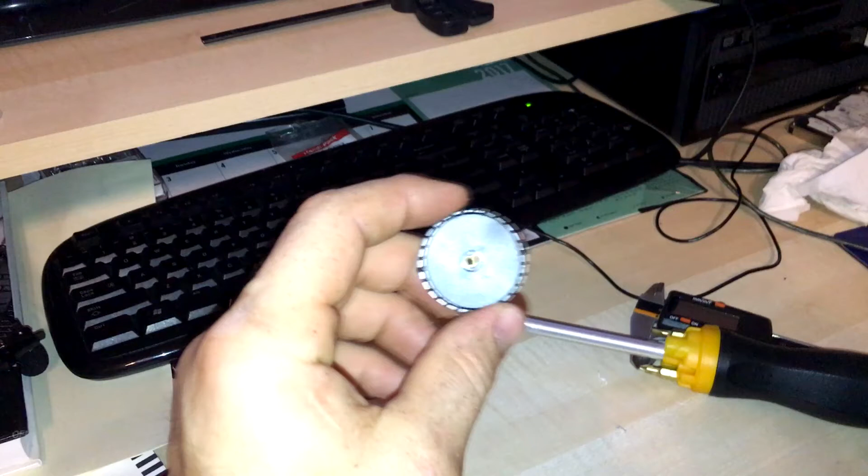Today on Do It, I'm going to be showing you step by step how to create a 3D model of this MakerBot build plate leveling knob so that we can 3D print it as a replacement.

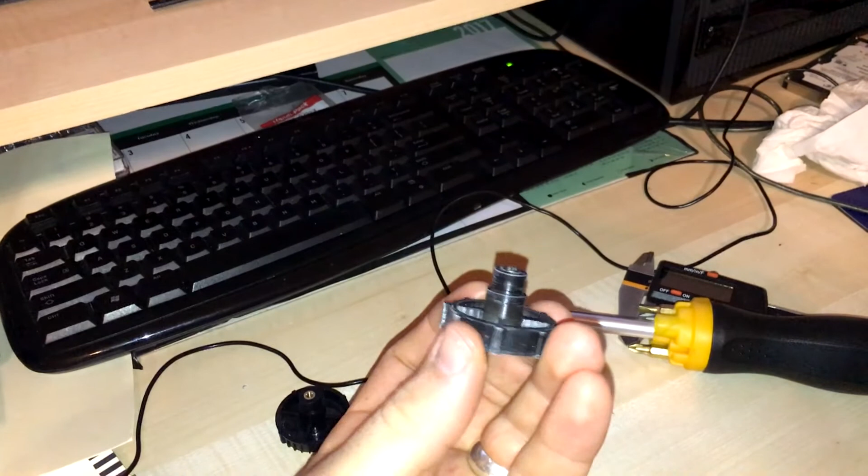Alright, so let's see if we can't guide you through my modeling process for this knob. Something that I brought up in a previous video that's worth mentioning again is that SketchUp is not always the best choice when trying to model something that you know you're going to 3D print, for a number of reasons that I'm not going to go into detail in this video, but I did find a great resource, this website here, iMaterialize. Let's get rid of that ad. iMaterialize 10 tips and tricks for 3D printing with SketchUp.

It's a really great rundown of some of the ways to get around certain features of SketchUp that might hinder your model from 3D printing in the best way possible. So I'll leave that link in the description, but it's a really great write-up with some good images and some great tips if you're looking to use SketchUp for that reason.

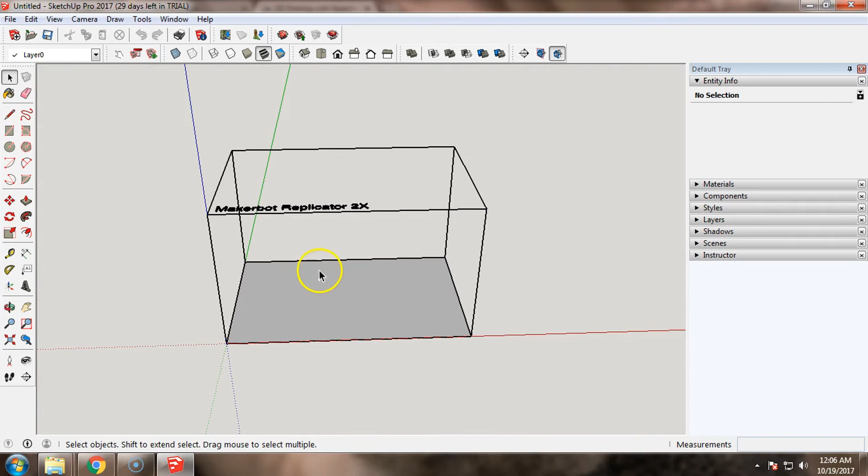You always have to start by using a template. I've already scrolled down here to a 3D printing millimeters. I'm going to use millimeters because our MakerBot is always in the units of millimeters. So this template isn't really anything more special except that it comes with a component already on the zero axis here that represents the print area for a great number of 3D printers out there on the market.

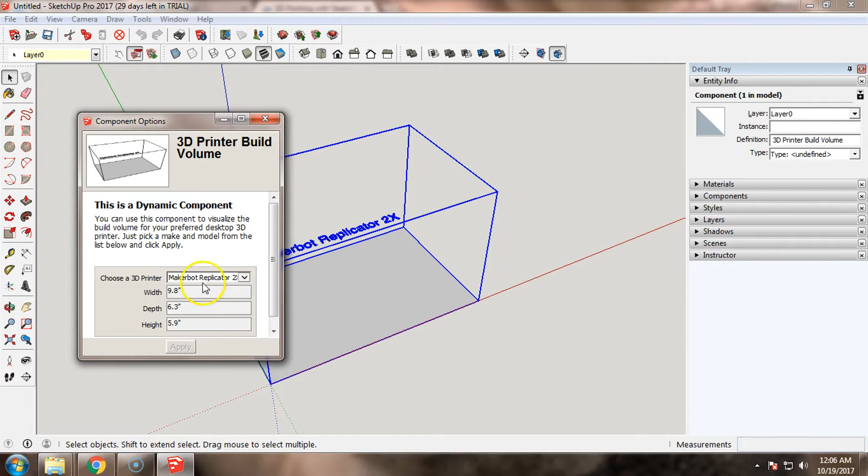And I can show you if I select it here and go to my dynamic components menu, you can change the 3D printer that you are seeing and its print volume. So here, by default, it shows MakerBot Replicator 2X. And here's what makes me laugh. So we're going to be using a MakerBot Replicator Mini, this one.

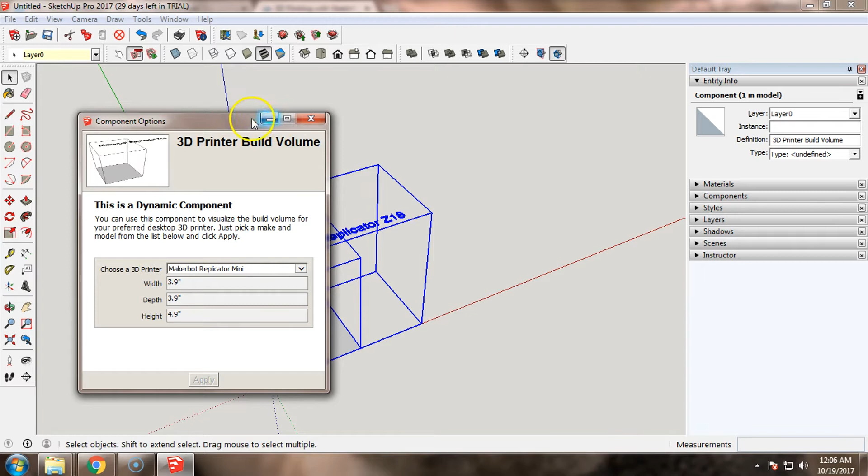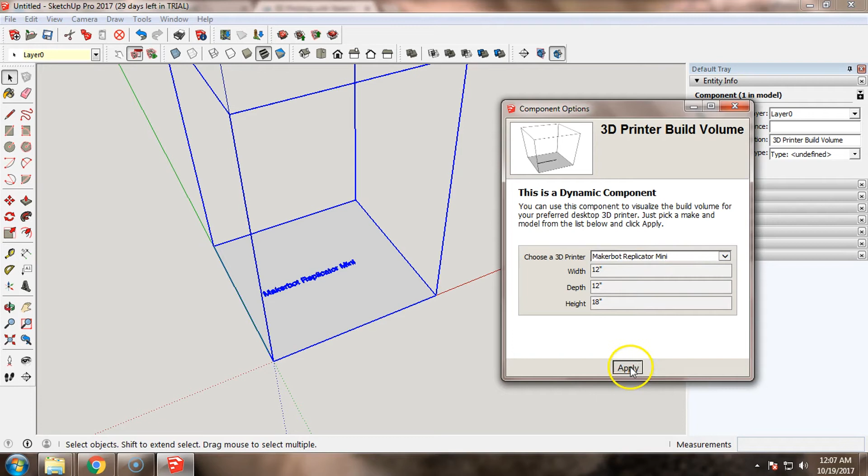But the title shows, watch this when I apply and change, a Replicator Z18, even though the print volume is representing a Replicator Mini. It makes me laugh. If you show a Z18, print volume is accurate, but then the title changes to Mini. So I don't know who needs to contact Trimble and let them know that their software has a slight typo in their component here, but anyway, worth mentioning. So I'll go ahead and put the volume for a Replicator Mini here, even though it says Z18.

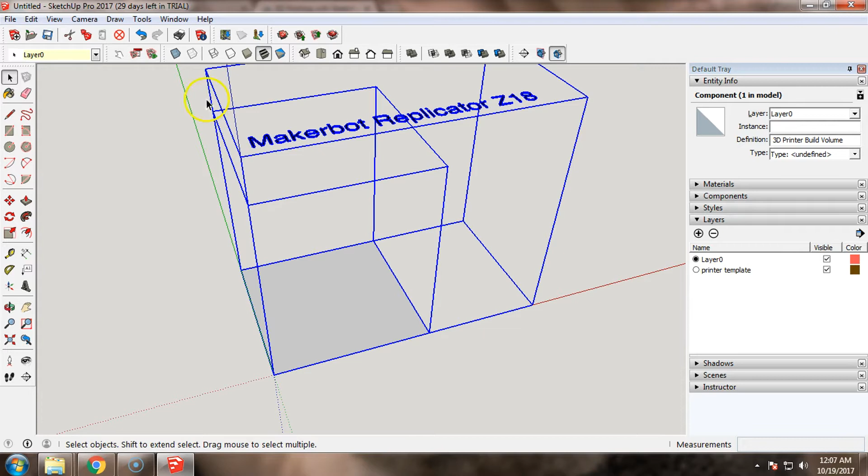And one last thing, I don't really want to be staring at this the whole time, so in my layers, I'm going to create a new layer, call it the printer template, and we're going to move it to the printer template, and we're going to blank that out, make it invisible, so we can model on a nice clean area here. So let's get started.

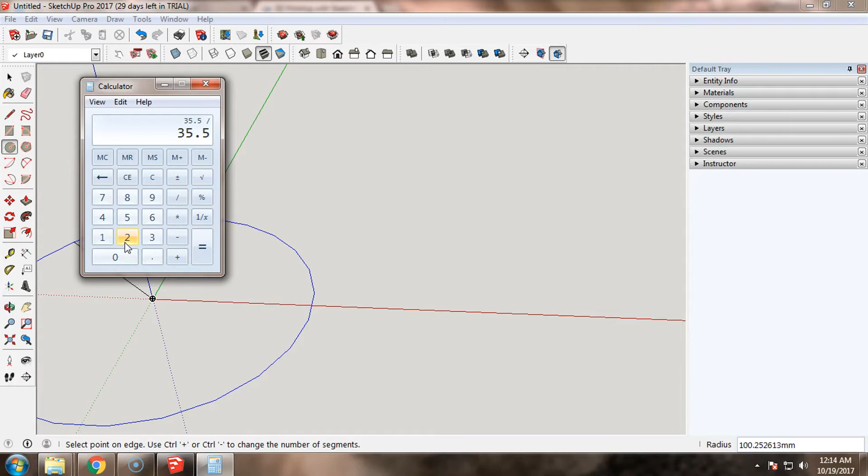So it isn't too crucial to be 100% accurate on some of the parts of this knob that don't house important components. So I'm just going to kind of race through a lot of these measurements and modeling, and I see that the outermost diameter of the knob is 35.5 millimeters. So since SketchUp asks for everything in radius, I always like to have my calculator handy. 35.5. Not that I can't do this in my head, but it's always good to check. 17 3/4 millimeters.

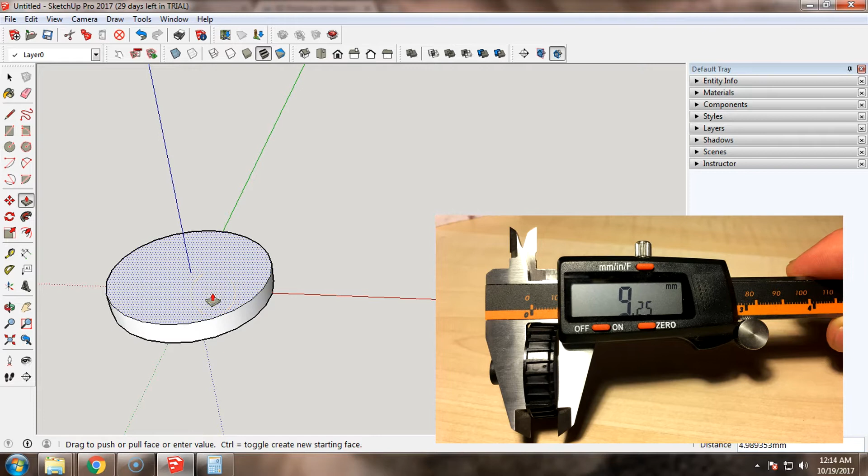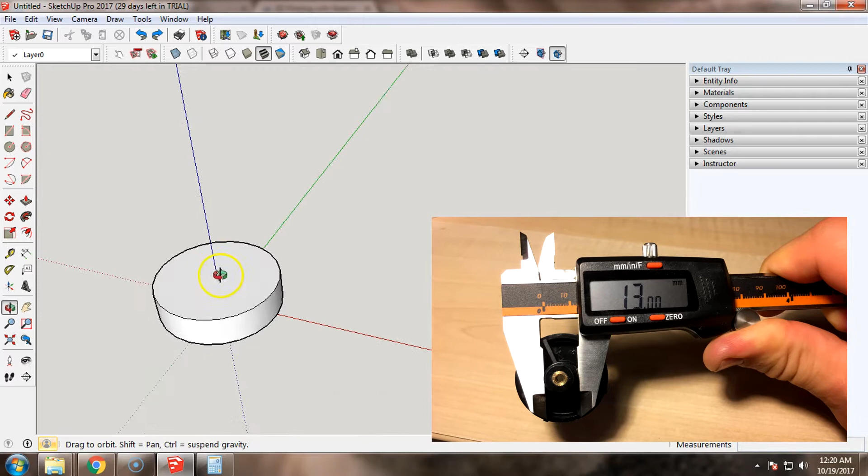Off we go. The height of that part of the knob, the thickness of it, is 9 1/4 millimeters, so 9.25 millimeters. And we're off to a good start. It looks like the center cylinder coming out is approximately 13 millimeters in diameter. Half of 13 is 6.5. So let's find our inference to the center here. 6.5. Enter. And let's go ahead and extrude him his full height.

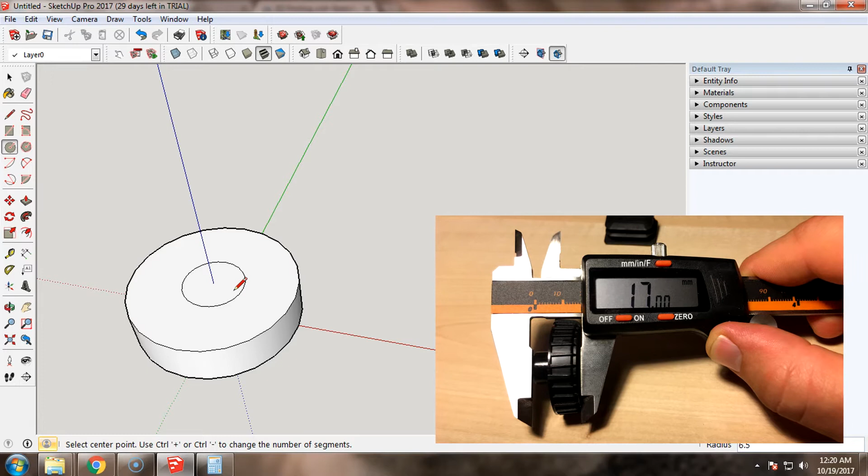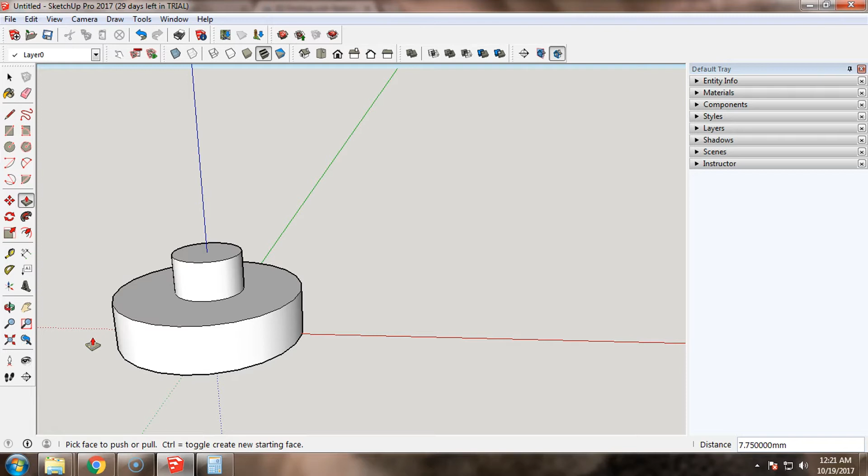And from the very bottom of the model is 17 millimeters. And since we've already extruded 9.25, 17 minus 9.25 is 7.75. From here, let's create sort of the hollow features of the knob. This not only is going to keep it more lightweight, but it's going to save us a lot of material when we 3D print. So rather than create this all solid, let's create those little cross supports and hollow it out where it's supposed to.

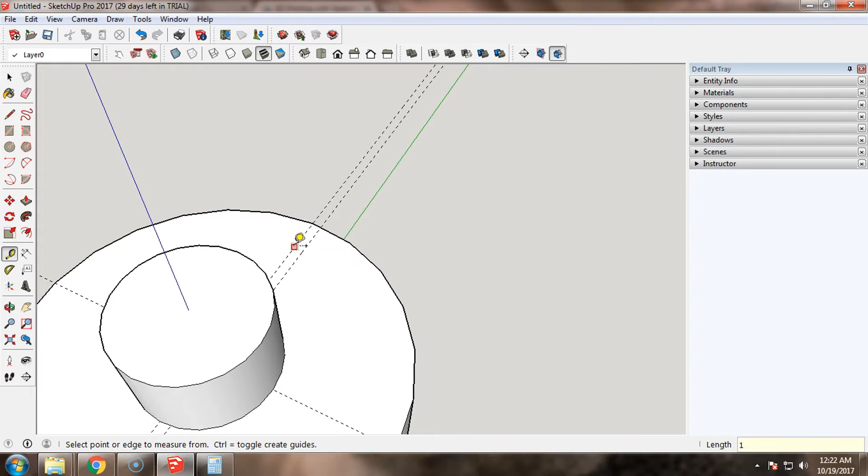So rather than move this guy, I'm going to bring the axes up, and I can see that the thickness of the supports of the little cross members are just shy of 2 millimeters, and just to keep things simple, I'm going to round it right up to 2 millimeters. So if I offset each of these by 1 millimeter, those outer guides now represent the outer edges of the supports.

And just in the spirit of keeping things simple, let's make the very outer, I think I had a measurement. Let's take it again. Yep. Very outermost part of this was 2 millimeters as well. So let's go ahead and select it and use the offset tool. 2 millimeters. Now we have all the geometry we need to reference these guys.

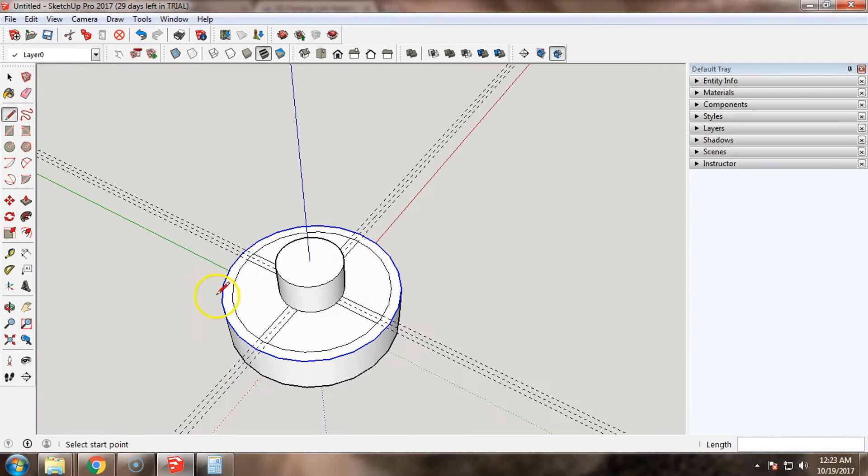I'm going to do this on all 4 sides. There are different ways of doing this. Once you create one quadrant a certain way, you can certainly use the rotate tool and array those features, but this isn't too bad if you're only creating 4 anyway. So there's all 4, and if I did it correctly, I can erase some of this connecting geometry, and that will link them all where they need to be.

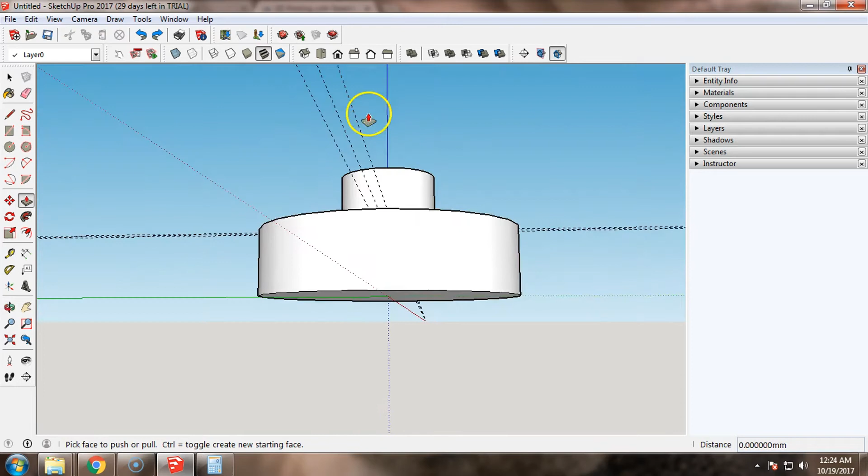And these 4 faces are indeed their own faces. So when I push-pull them down, I should be left with this outer ring as well as the 4 little quadrant supports. So in the interest of keeping as many things uniform as possible, but also conserving my strength, integrity of the part, I want to leave at least 2 millimeters of thickness of this bottom part. So since we extruded him 9.25 millimeters up, let's just bring him down 7, which should leave me with 2.25 millimeters of material at the bottom here.

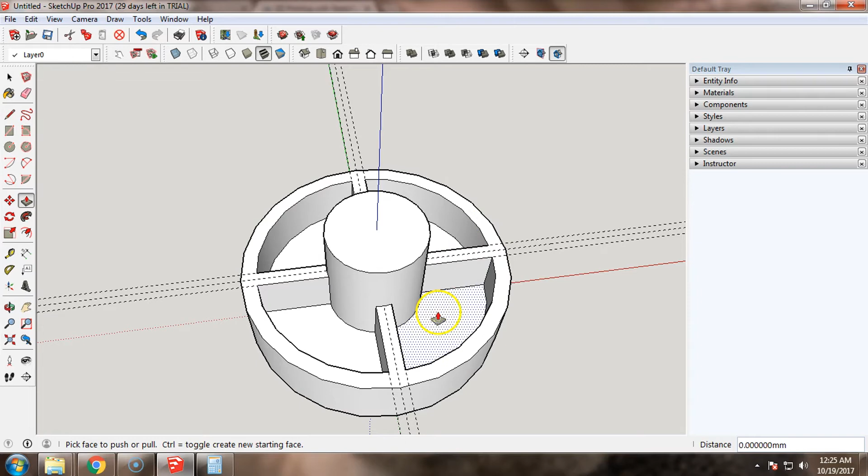So select one face, hit 7, down he goes. And quick tip, SketchUp remembers the last value of whatever function you used. So rather than selecting and inputting that value, I'm just going to double click and it will continue to use 7 as its value. And now we're starting to get a part that looks a little bit like our original knob.

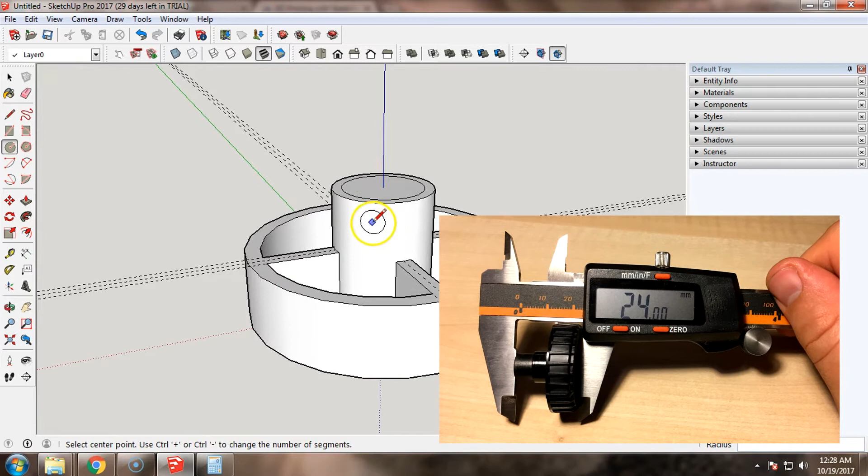So it looks to me like the diameter of the cylinder that extends from this face is 10.5 millimeters in diameter. Half of 10.5 is 5.25. So that's our radius, 5.25. And its height from the very bottom is 24 millimeters. And since we've already extruded 17 of that, looks like we're going up 7 millimeters. Oops, wrong tool. Push pull, this face, 7 millimeters.

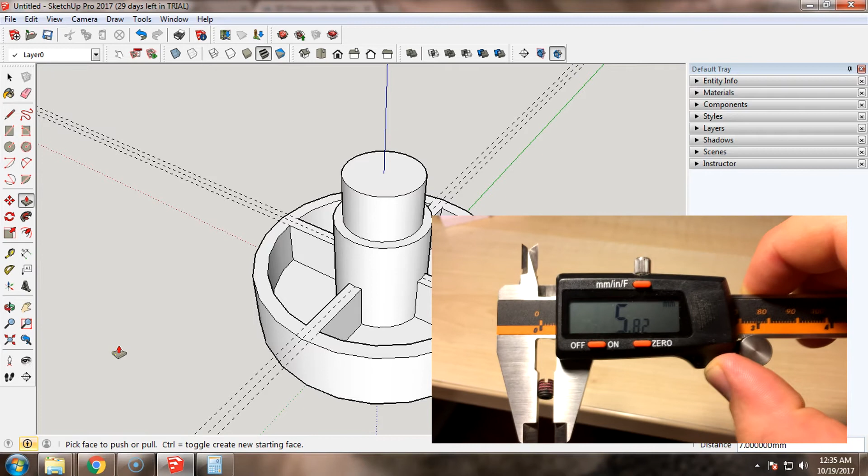So the original knob has its own attractive, exact threaded insert, but I had to go to the hardware store and find my own. And the height of it is exactly 6.5 millimeters, and the outer diameter of all the threads is about 5.8 millimeters. So what I'm going to do is make my hole here 5 millimeters in diameter, which is 2.5 millimeters radius, 2.5. And I'm going to extrude it down the exact measurement.

It's kind of a risk. Our 3D printers aren't so finite to get to the 1/10 of a millimeter. But let's have some fun. I'm just going to extrude it down and go exactly 6.5 millimeters and see what happens when I thread that guy in here. And I'm also planning on using some plastic specific Loctite super glue.

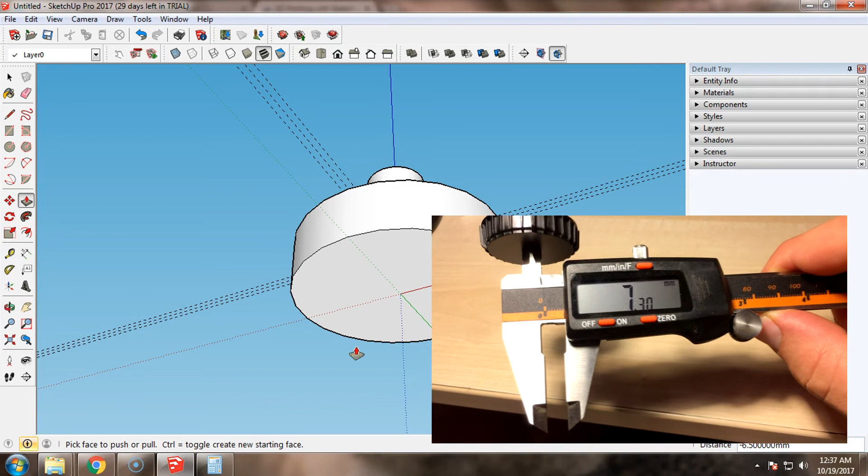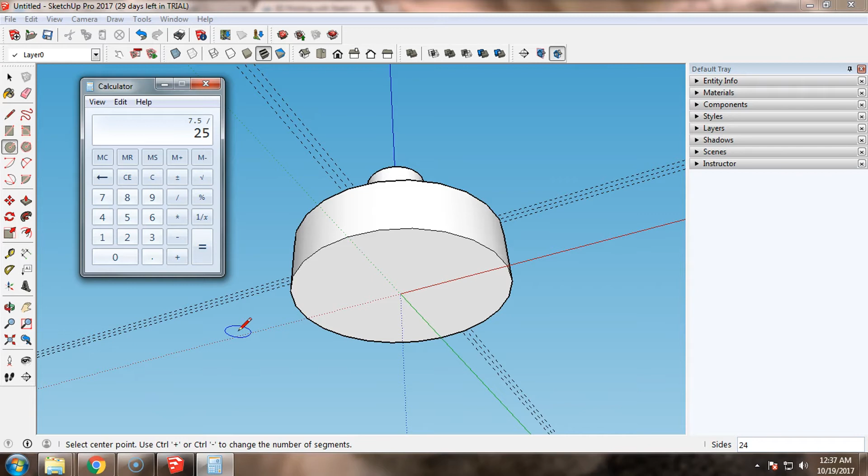There's also a hole on the underside here in the center. And I know we said we weren't too crazy about making everything exact, but it's not too hard to do this one, so let's have a little fun. The diameter of that hole appears to be about 7 to 7.5. I'm circling my calipers around. It looks like about 7.25. Let's just go 7.5. Half of 7.5 is 3.75. Hey, look at me go. There's the center. 3.75.

And I'm going to use my depth gauge to find how deep it goes from this side, because there is in fact a step off, a difference in the diameter of the hole the deeper we go. So let's put the depth gauge of my calipers there, and it looks like that part of the hole goes 14 millimeters down.

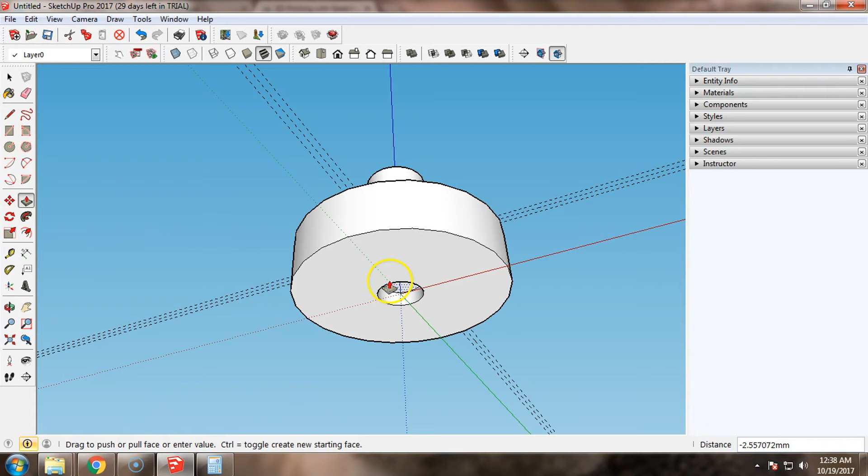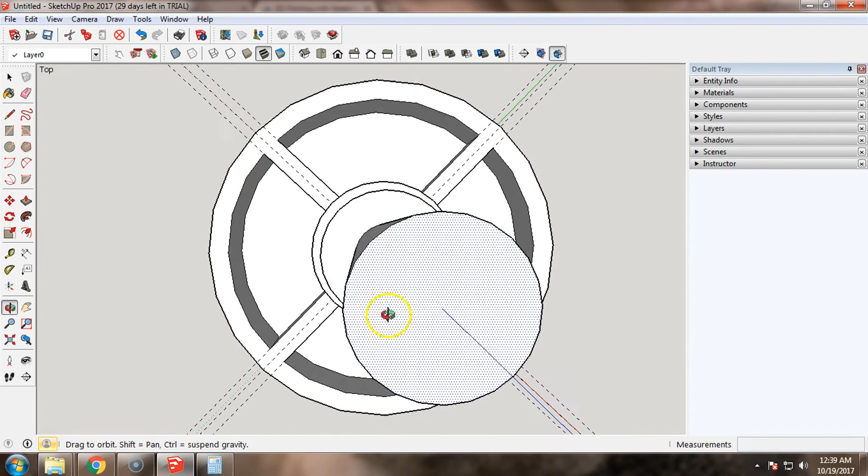And we are almost done. To finish this off, we've just got to make this hole completely hollow. If memory serves me right, the screw in the tensioning part of the leveling plate is rather long, so it's going to go beyond the height of the threaded insert that's going in here. So what I think I'm going to do is actually take this cylinder down to meet the face here, and we've got our hole.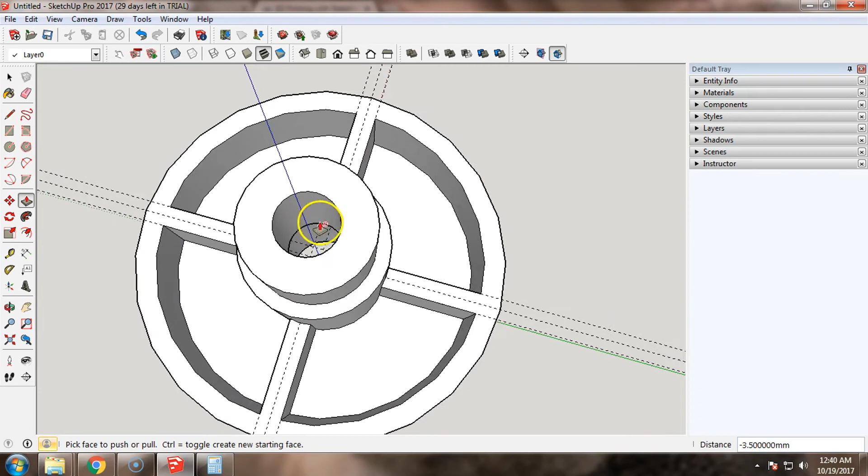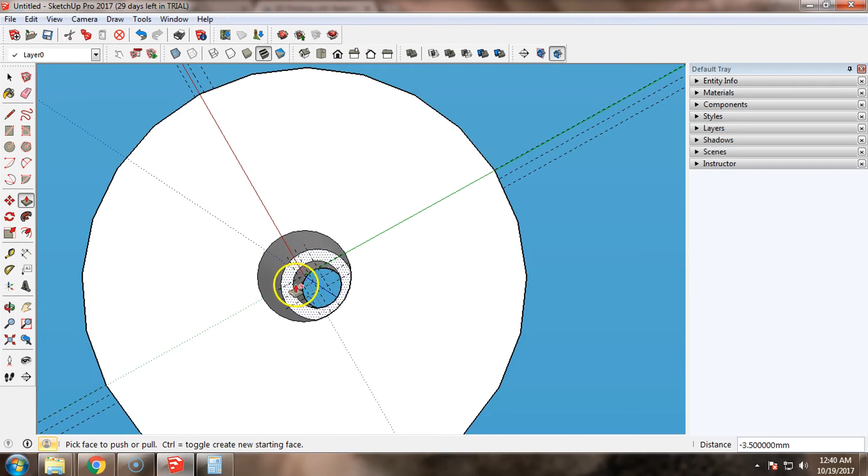See that we're seeing through all the way up to the sky, and in this case we're seeing right through down there. So our threaded insert ought to go right down to where we extruded the hole to initially. But if the screw in the MakerBot does in fact exceed the threads there, it has space to travel through. So we're good to go.

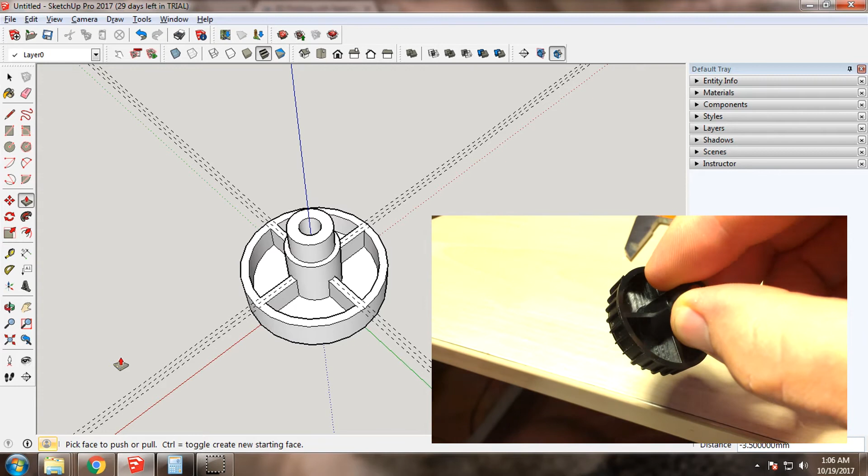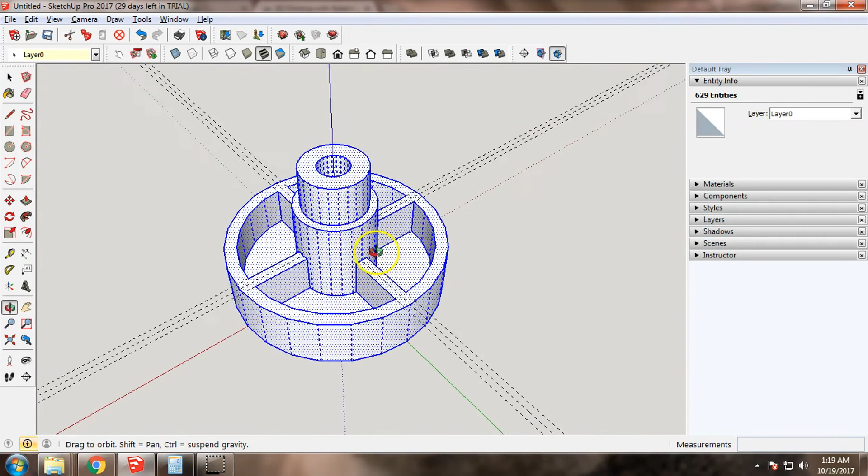The last thing I'm going to do isn't really necessary, but the original knob has these ridges all around the circumference of the outer knob. We're not going to do them all, but we are going to do a handful, and we're going to use the array tool. This operation is going to get a smidge complicated, so bear with me, but we are going to triple click this entire guy and right click and make him a group.

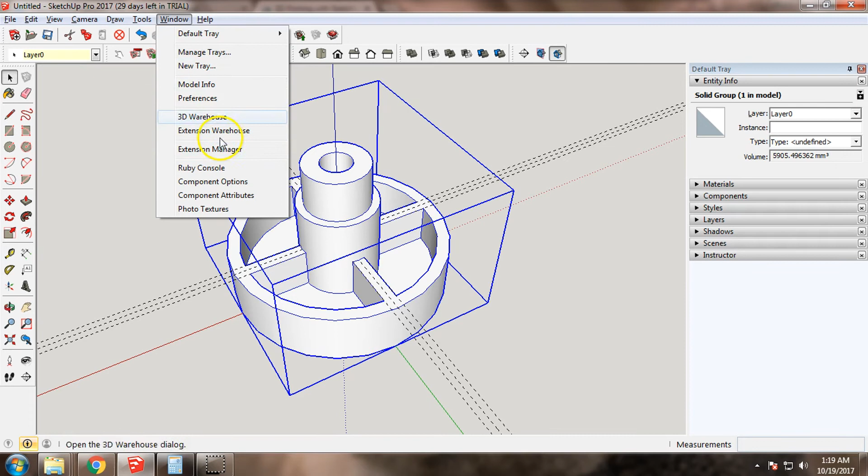And if you've done your work correctly so far, in your entity info, it should say solid group. If you are in a previous version of SketchUp, go to Window, Entity Info. Well, as far as I know, in previous versions, Entity Info is in here near Model Info. But it should say solid.

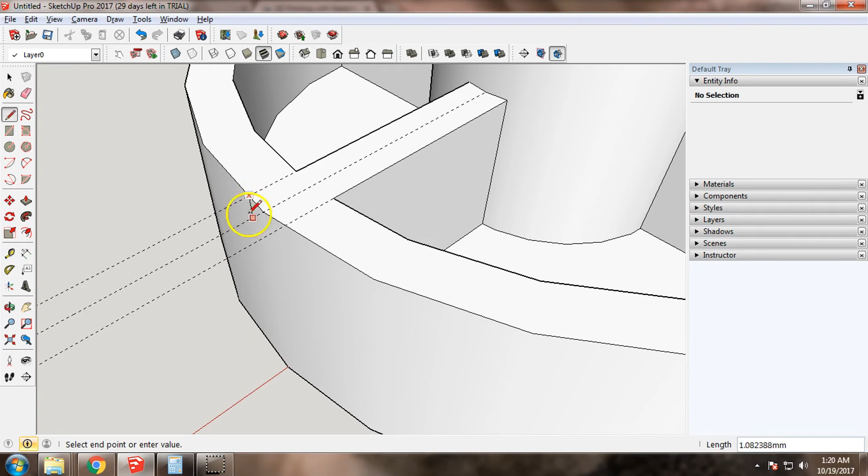We're going to create all 8 of our little segments for our thumb and finger positions based on 1. So since we've got a nice 2mm theme going on, if I click at this intersection of the guide to the group, bring it out, and I'm going to hit 2, enter, keep it locked on the green axis across to the other guide, and then bring it back to the intersection.

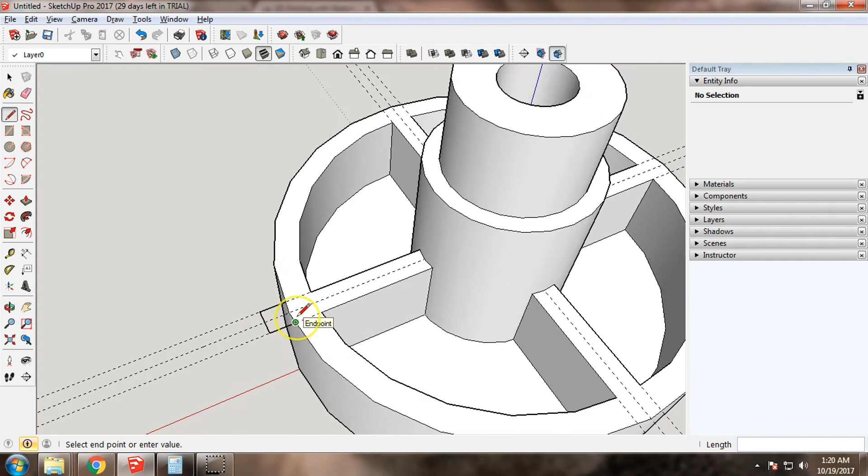Now here's where it gets kind of tricky. SketchUp, even though it's not the best because of its segmented circles, notice we have midpoints and endpoints, it chooses a default that's very cooperative with splitting a circle up into even parts. So we're going to finish this face by working our way around the edge of the circle. So I'm going to snap here, and that should complete our face, and it did. So we have a completed closed vector right here.

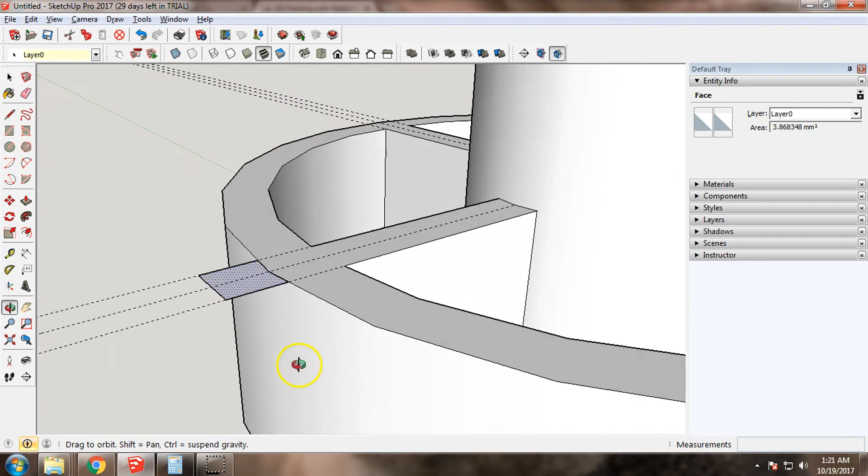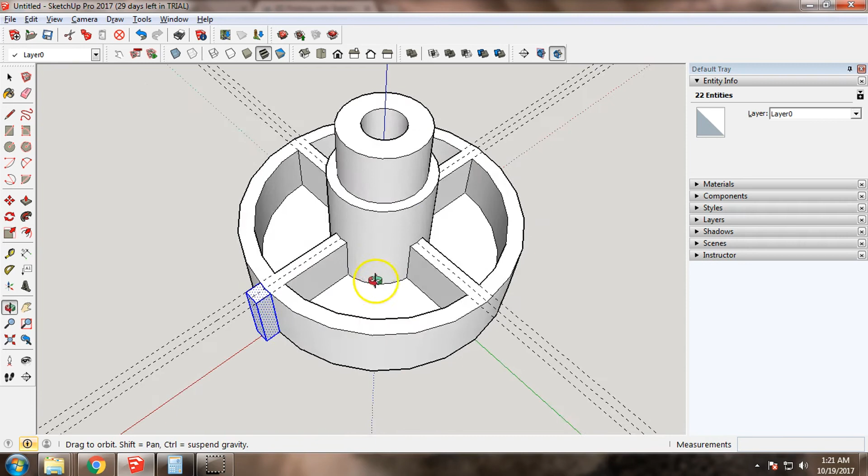Let's push-pull down to the bottom. And before we go grouping anything, this is where we're going to triple-click and use this guy and array him all the way around the model. If you're not familiar with this, pay attention, but any move or rotate tool you use in this program, if you tap the control key, notice there's a little plus sign next to my cursor now, and that means it's going to create copies.

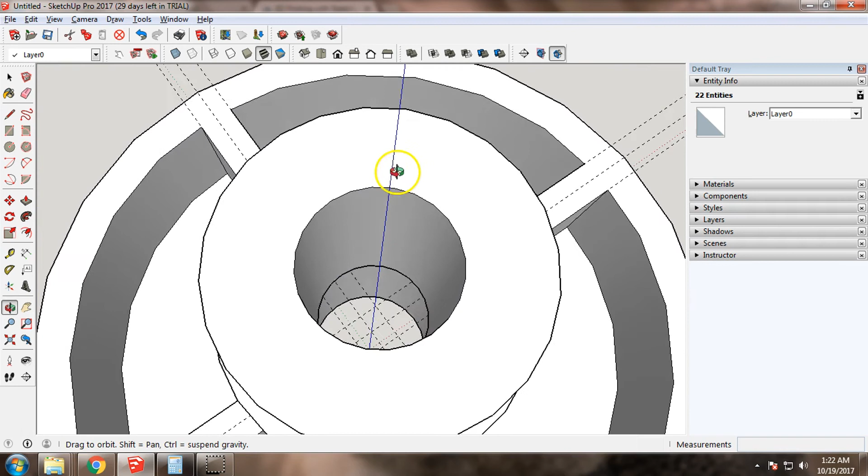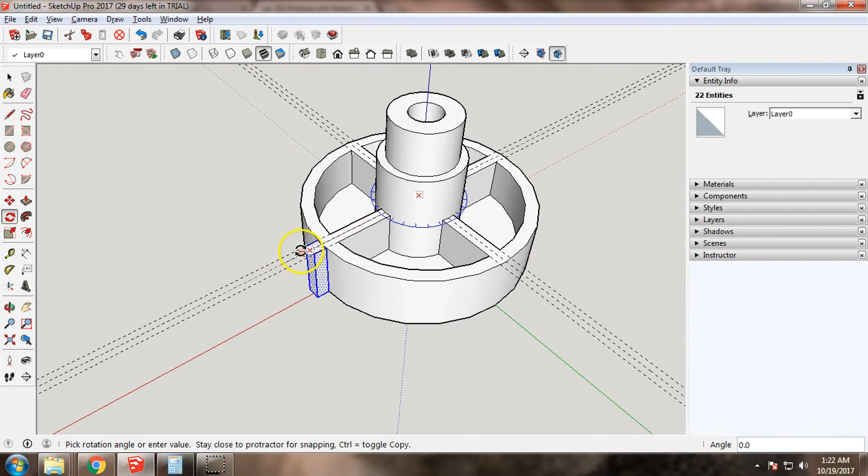So as my rotation plane and origin, as it shows right here, I'm going to select the intersection of guides we've created. The origin might work too, but I want to use the top face of our selection. So there it is. There's our intersection and our center point of rotation. And I'm going to bring it out to the endpoint right here. Click, and notice I'm rotating around this circle, but it has deleted the original. This is where I tap control and it toggles our copy.

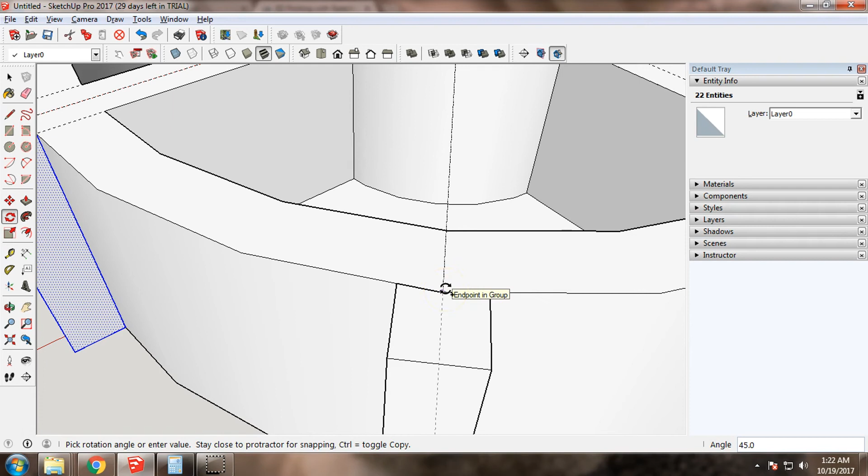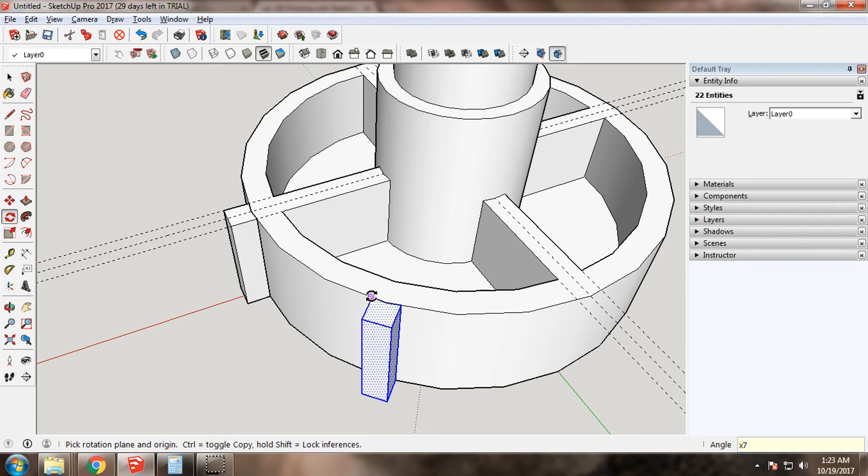If I go exactly 45 degrees, it's going to line up exactly with an endpoint of segments along this circle. So again, this is one of those points where SketchUp is not the most ideal for creating solids for 3D printing, but if you know what you're doing, it's not that bad. So I can just snap here, or I can type in 45 degrees, enter, and before I do anything else, we are still technically within that command. So I can do an array if I just tap X, in this case it means times, and I'm going to do 7, enter, and it completes the rotation command an additional 7 times at 45-degree intervals.

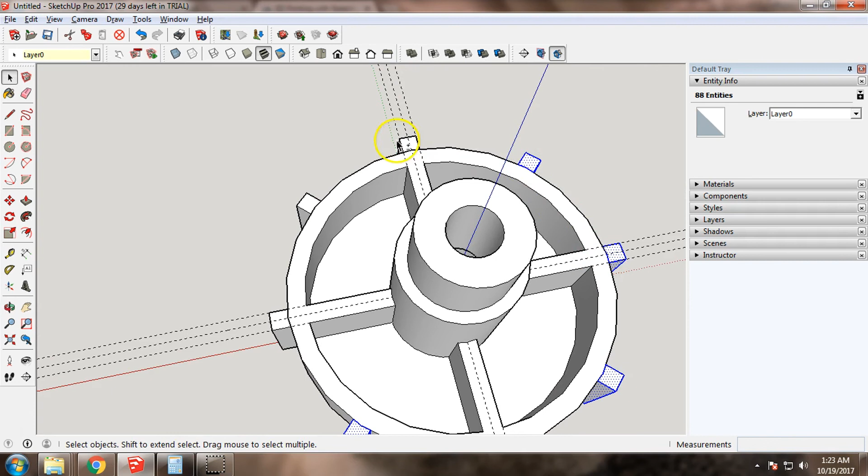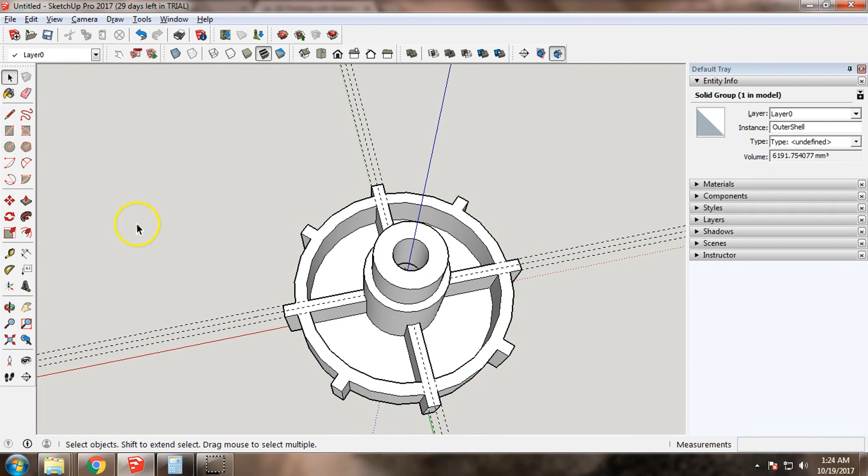Using my selection tool and holding Shift, I'm going to triple click to get all the rest of them. Right click, make them a group, and you'll notice that it's a solid. There's no conflicting geometry, and I can easily use my outer shell and select the other solid, and voila. All those interior pieces of geometry disappear as it creates. When I click, you can see a solid group ready for 3D printing. Now all we got to do is send it off, export it, and 3D print the sucker.

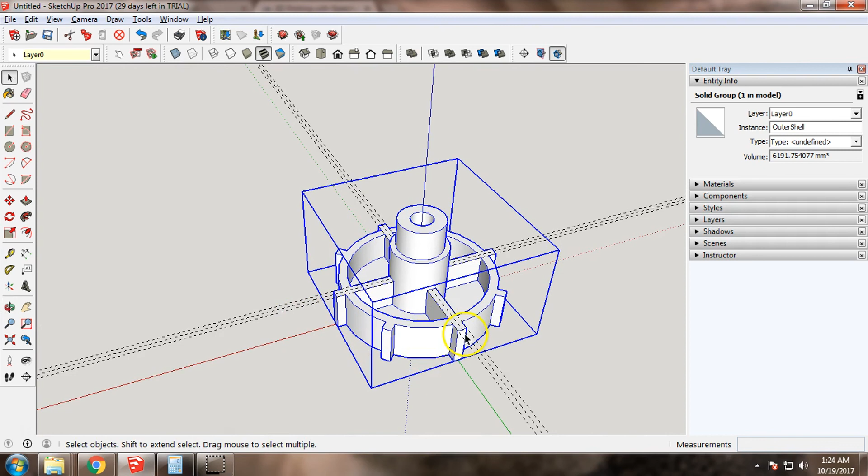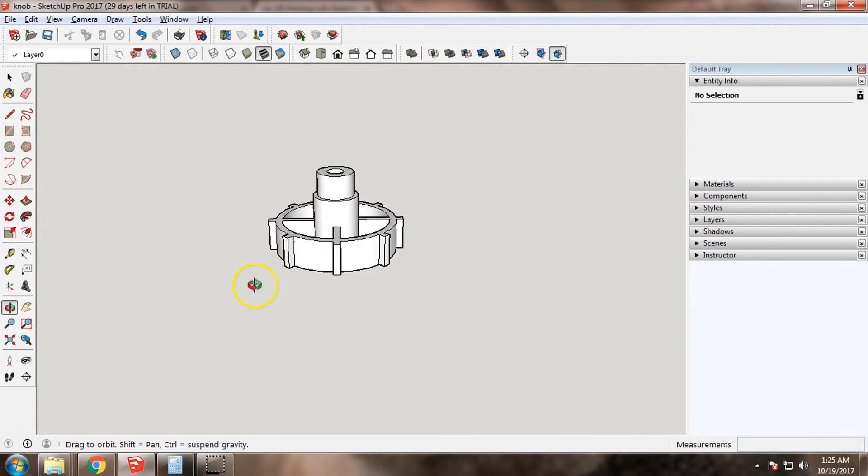And now just to clean it up, I'm going to go to Edit, Delete Guides. And if you really want to see things as they stand, you can go to View and uncheck Axes, and there he is, kind of floating in space. Our brilliant little solid MakerBot leveling plate knob.

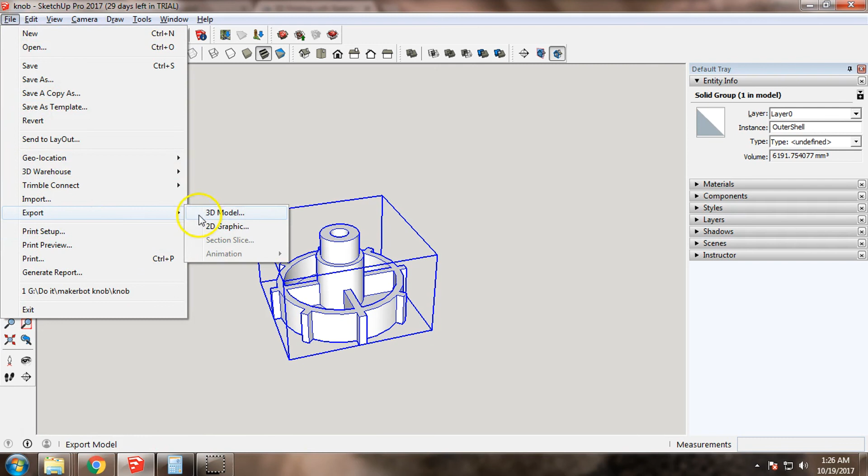To export for 3D printing, can't leave it as a SketchUp file, so you go to File, Export. Now this is where in the past you used to have to go to the Extension Warehouse and get the STL extension. OBJs work pretty well here, so if I export 3D model, there's a whole lot more options than there used to be. And in this case, I'm going to export as an OBJ. I'm going to leave it as knob, hit export, and that should go into the majority of slicing softwares for 3D printers.